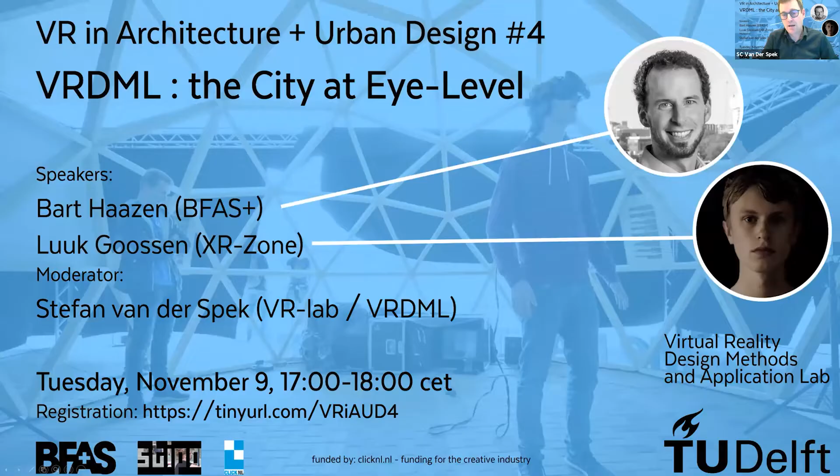Virtual reality, a better city at eye level. Welcome everybody.

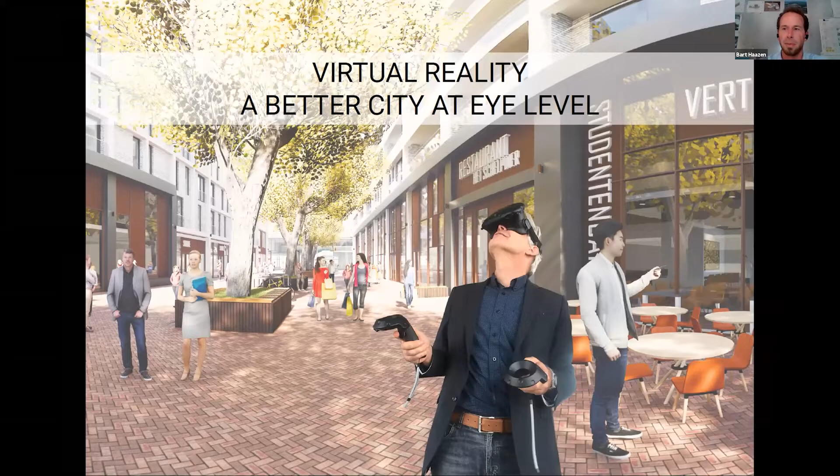A little introduction: my name is Bart Haazen, partner and architect of BFAS+. We do architecture, urbanism, and placemaking. For the past 10 years we've worked in 3D, and the last 5 years we've used VR as a design tool to develop our designs.

Via this way, we contacted STIPO and the TU Delft, and this was a real opportunity to take VR to the next step. We combined our VR team with STIPO, Sven, TU Delft, and BFAS ourselves. Sven was part of our team at BFAS - he's an expert on VR also.

How to make an attractive urban environment - that's what we see if we look around. You see nice places to be, but there are also spaces that you don't want to be. And how is it possible that still those places still are there?

What is going wrong? What we know is that the process in design is very complex, and it's still becoming more complex if we look to the future.

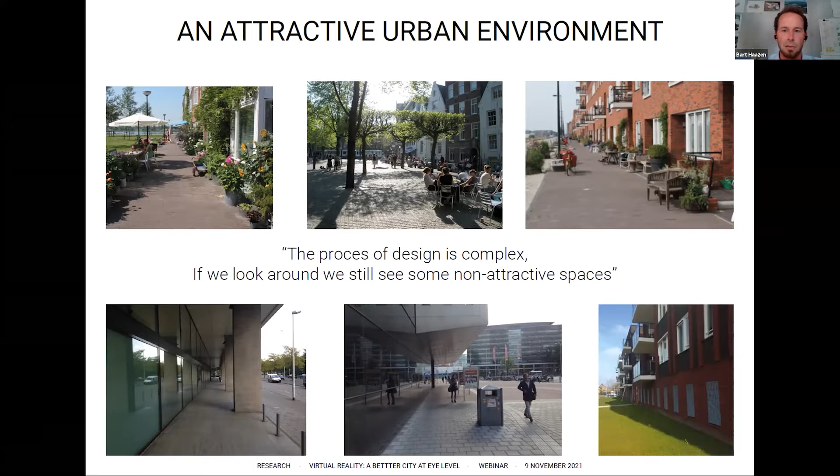One of the most important things that we as an office look at is the plinth of the building. It's just 10% of the building, but it determines 90% of the experience. We have a lot of tools to make the plinth nice and attractive, so that people don't only walk through, but really want to be there and want to sit there and talk there.

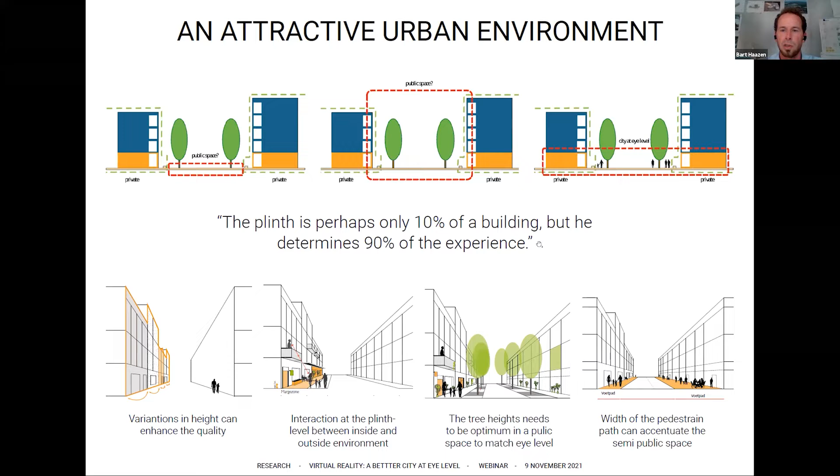So there are a lot of tools, you see that below. You can add trees or pavements, or have interaction with the plinth. You can model different heights to have more differentiation. There are a lot more tools to use to make it an attractive environment.

Virtual reality - what can it do to make those places nice? Is it only a nice experience, virtual reality? No, we don't think so as an office.

We really do think it is a nice design tool, because we use it every day in our architecture and urbanism as an individual designer. We use it a lot in the office, but also for cooperation with the municipality or other advisors. It's a very strong communication tool, also for people that live there, for participation in the environment. Those things are, how do you say it, general.

But the next step, we think, as with what we did with the VR team, is data analysis. That is really the next step in virtual reality that you want to research.

First, in the beginning, we had 2D drawings, then we had a computer, then we had to do 3D design. And in the last year, you see in the design that we use a lot of BIM data. If we put data in the design, other people, other advisors, can use that data to make fewer mistakes.

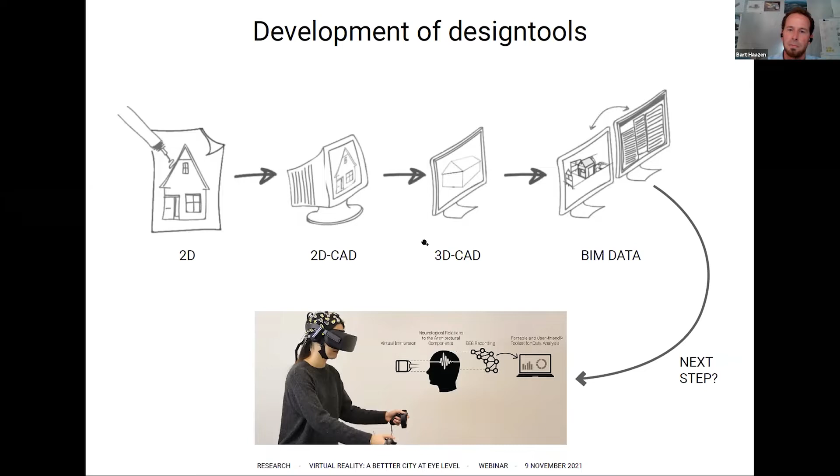These are some examples - voorbeelden, how do you say that in English?

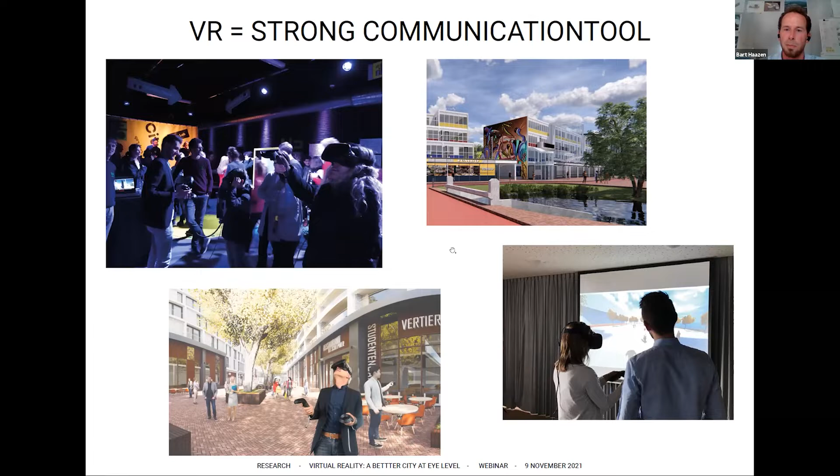Now I want to go to the research we did with our team. We did two researches: one is the street in Sluisbuurt, Amsterdam, and the other one is Bogaard in Rijswijk. I want to first show the first research.

This is Sluisbuurt, it's now in development. The municipality of Amsterdam, it's in the east of Amsterdam. And it's a precarious project because there's a lot of high-rise. The high-rise is a big discussion in Amsterdam because everybody knows it's a very historic center. This high-rise is a thing.

So we had an assignment with Amsterdam to look in VR what VR can mean in this street, and what it can do to enrich it, to make a good street.

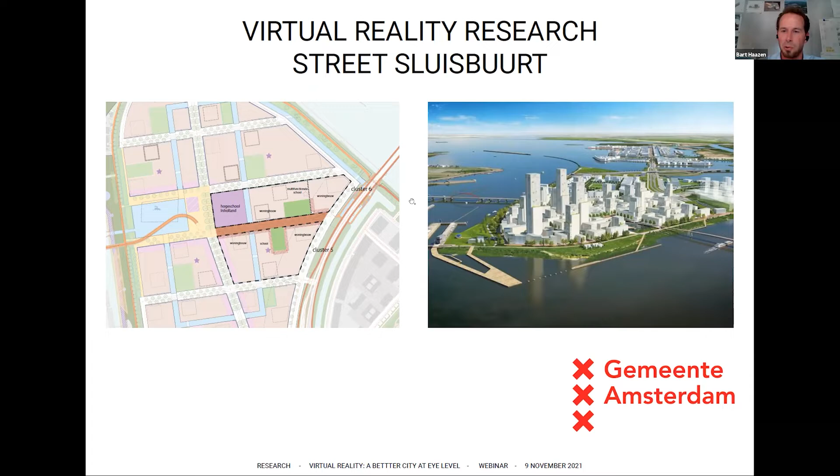What we did, we started with some ideas. We had a brainstorm with our group. So what can we do to research these streets? We talked about what we can do in design options in urban situations. Can we make a design option with high-rise or not? Or how much detail do we put in the model? How can our target group understand the VR?

So when we were thinking, we thought really: how can design influence the perception of the users at eye level? And what can we do?

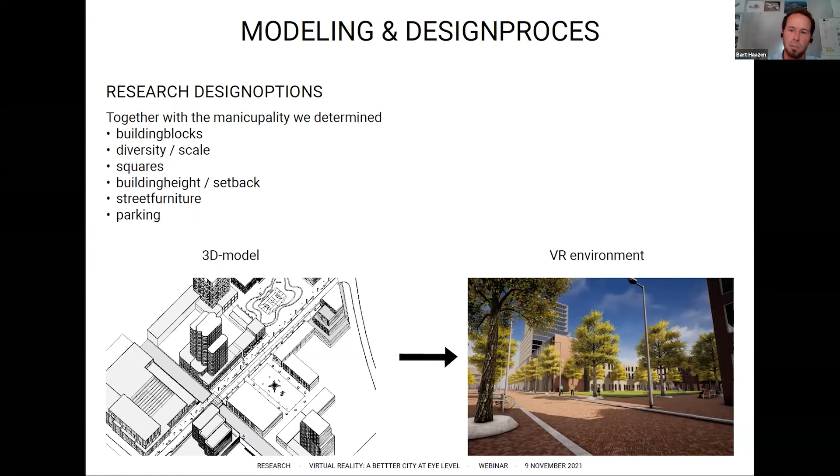We made a 3D model in Revit. We can do that very quickly, and we use Enscape, you see that on the right, to have a really realistic impression of that. This way we worked with the municipality through the model, and we had nice discussions.

Then we built the VR. We did the VR research session, and Luc will tell later about it. But the Enscape we made wasn't good enough for the VR, we couldn't use it, so we did some other nice stuff to have some data from the VR session.

First we did an intake, just some questions to people, like had they ever used VR before, that kind of thing. Then we started, and it was 3 sessions of 7 minutes.

First we started with a baseline. You walk through the model, the VR environment, for 7 minutes to see how it works, and so you know the way you want to walk. That was the first step.

After that we had 2 assignments, assignment 1 and assignment 2. In assignment 1, group 1 had a design option with all the things we had before, for example green or not green, low tower, high tower - that kind of design options we had built in.

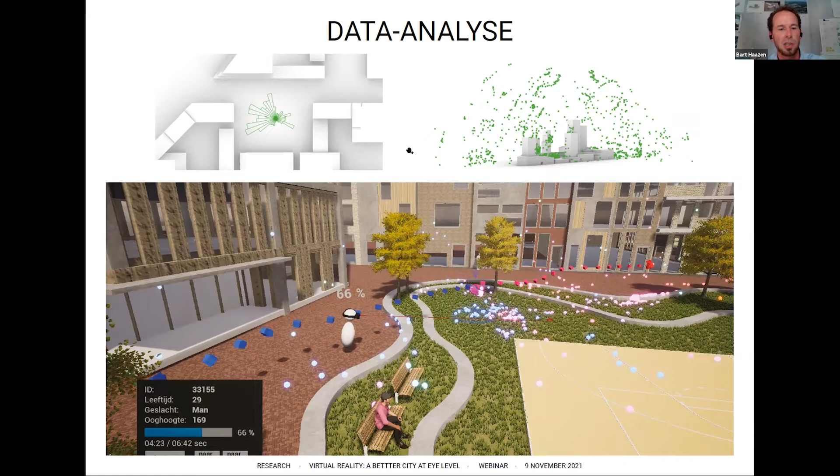After that, with the team, we looked at how we could use the data that came out of the VR session. Here you see one of the survey persons who walked through the model. You see part of the design in the square, and you see all kinds of dots and routes - that's all data. We also used other analysis systems above to search for interesting data.

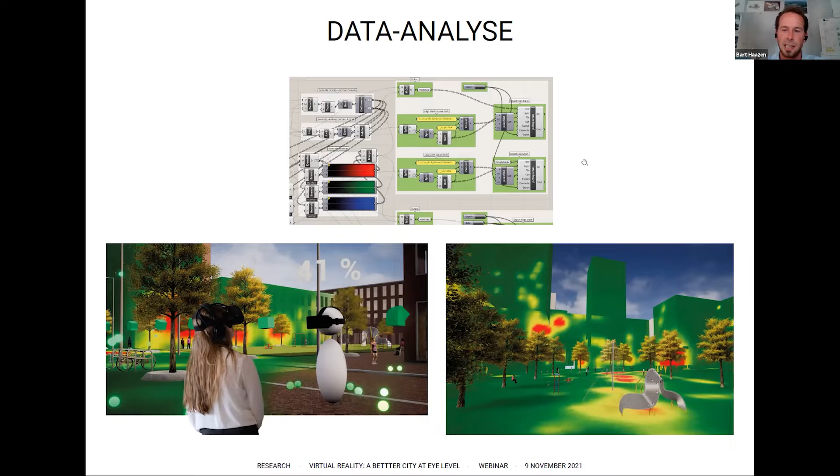A script was made to do that research, and we also had heat maps. The red spots are spots that people looked at a lot, and green less so. Luc will talk about this later. This is data that came out of the VR.

The conclusion, because we made a report - a very nice thing, the first point, is that most of the research group of students looked mostly at the height of 1 to 10 meters, 28%. They looked at the plinth height. The plan team and design team of the municipality did a bit less, because they're designers - they're always looking up. That's not the general person. We think it's very nice to see this, what I said in the beginning, that 10% is the plinth, 90% is how you experience it. I think this is a good test that it's almost true.

What was also very interesting is the corners - people looked a lot at the corners of buildings, which were also red-spotted. The students interacted differently with the area. They looked more at the walking people, because there were people walking around, cars driving, and also a playground with playground equipment. They looked more at those elements instead of what designers do - designers look at the facades, the architecture, and the environment. There was nice data there.

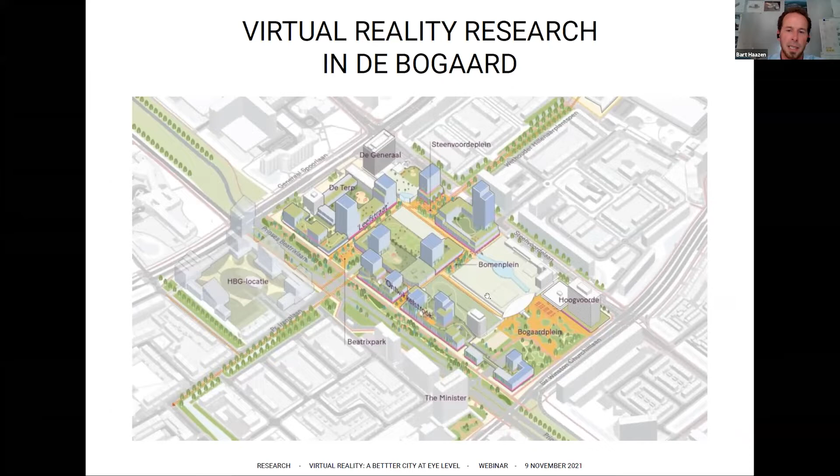We had here also some interesting design options that we wanted to research, and we learned from the past, so we had a different approach this time. We said we still have 3 walkthroughs, but we don't have assignments anymore. And to have really good measurements, we used these kinds of 360s - Luc will talk about that - and we can really compare the data.

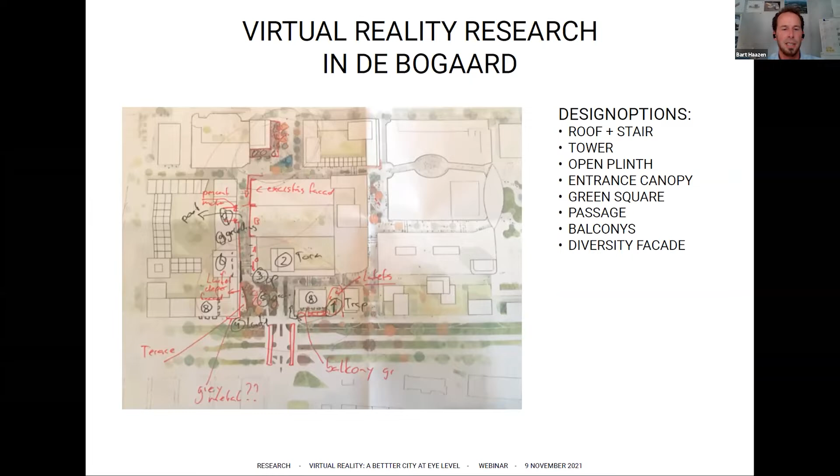I've shown a lot of information, but to make it more understandable, I have a little Enscape session for you, so I want to end with that. Let's see it in motion - there's a slight delay probably, but that's okay. It's graphical.

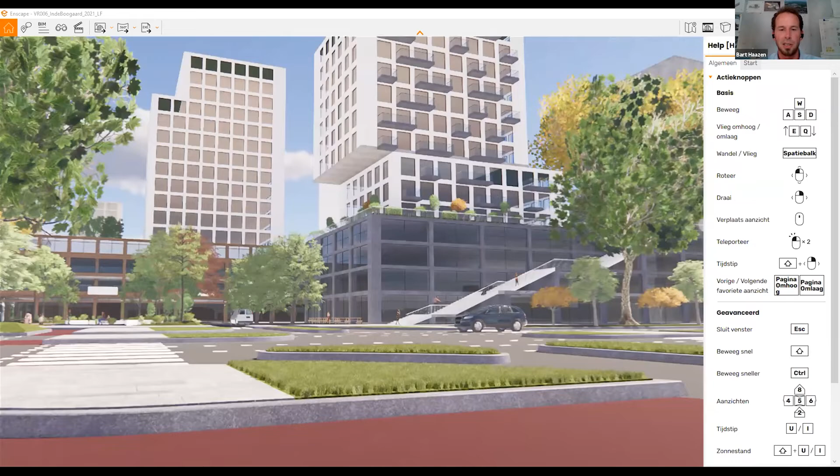Here all the options are on. For example, this stair - with one option, the stair is gone. We wanted to see the interaction of people, because you really see that you can manipulate people by design.

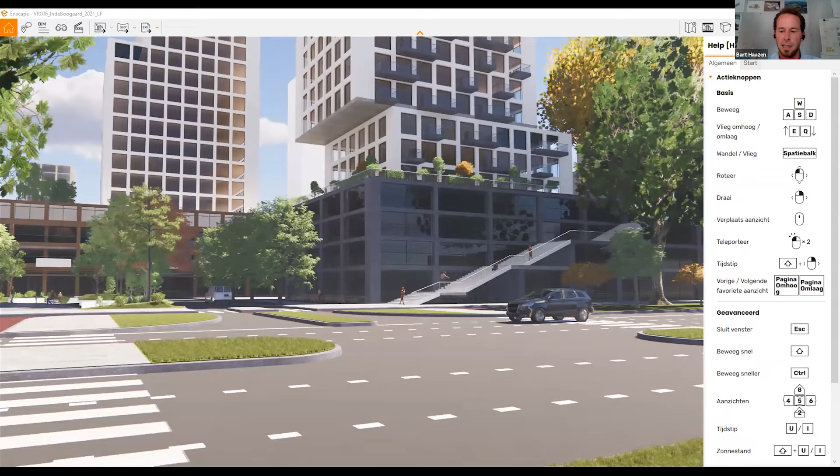There were 8 design options that I showed before, and we incorporated this into the model. This is not VR - we don't have the glasses on, so it's still flat, but this way you can see how we did the research.

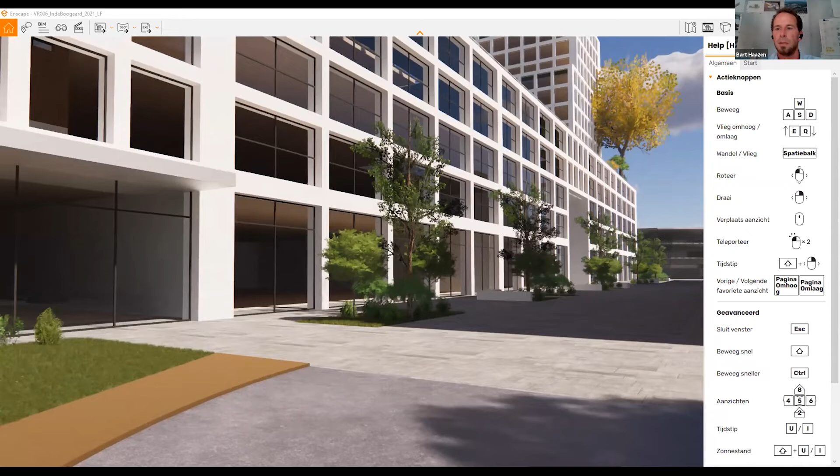Another research topic was this canopy - do you want it or not? Now, the municipality first said they wanted it, it was very important for them. In the VR, it was gone - they didn't want it anymore. This shows VR is a very good tool to use.

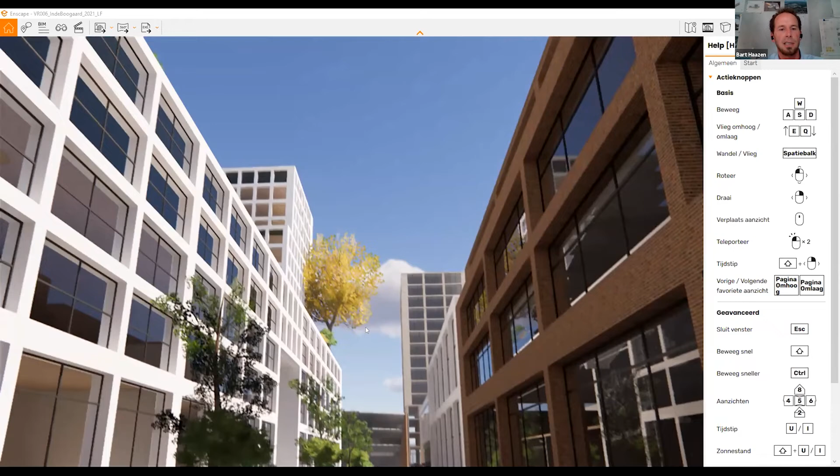Also in the plinth, we want it open. In the other design option, it was closed, because they didn't want open facades here - it had to do with the existing buildings behind it, or for example the setback of the tower.

We talked about that, and then we also had a passage, which was an interesting design option. We went through the model and people walked through it. You don't see that here, but everything is standing still.

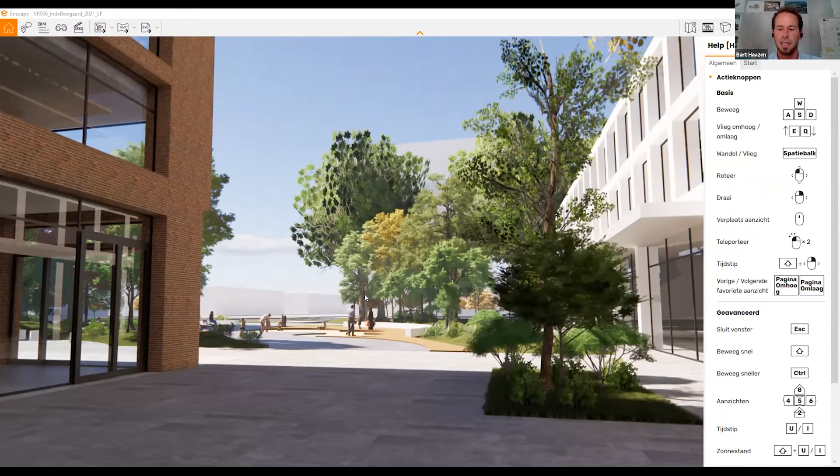But that was also the next step for Luuk - we really want to make an interactive environment, where you see people walking and cars driving. And this is where I want to end my presentation.

Perfect. So let's talk a bit about what we as TU Delft did. I understand there are a lot of TU Delft students and staff on this call, so maybe I can tell you something new as well. Together with Bart and the rest of the team, we worked on ideas for the Better City at Eye Level. The main focus of our task was developing the VR application and the tools for data analysis.

So who are we? We're the VR zone, soon to be rebranded to XR zone, as Stefan already said. We're located at the central library, and our main goals are to support education, support research, and do our own research and design development. We're open 9 to 5, Monday to Friday. Any student can come in - we have hardware here, and 10 staff members available to answer questions. You're always welcome to come in for advice, brainstorm, and learn and work with VR in any of your designs, cross faculty - architecture, maritime, or aerospace. We're always ready to help and brainstorm with you.

We also have our research tracks. We work as a centralized lab compared to what Stefan does with architecture. We mostly work cross-domain, developing applications for any faculty or topic. Our main focus is design rather than writing the actual papers, whereas the faculties have their own researchers who write the papers and understand the data - we just provide the tools for them. So researchers are always welcome to come in.

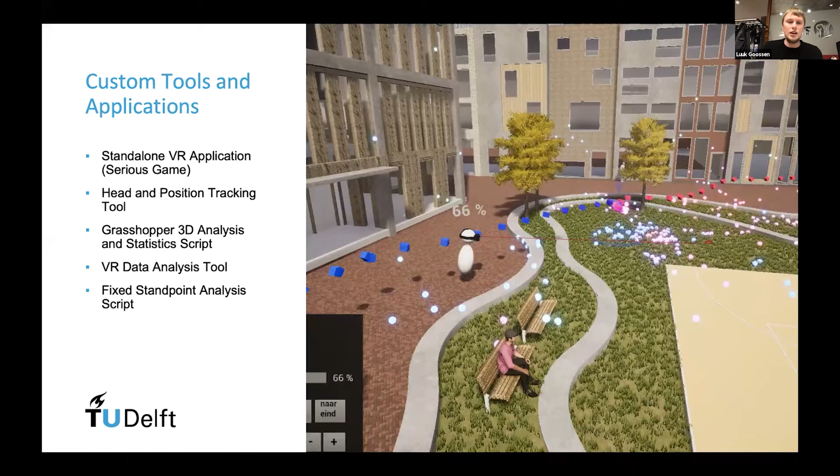So let's talk a bit more about the head and position tracking that I mentioned earlier. Essentially, head and position tracking is a method for a cheap replacement of eye tracking. Eye tracking is a technology used to detect what people are looking at. With head and position tracking, rather than measuring the eyes, you measure the rotation and position of the head. The position is important because we know the location of the participant within the map, and the rotation is important because we know what they're actually at least gazing towards.

So there's a couple of pros and cons to using this technique. The most definite pro is the very high level of support, because essentially to have virtual reality, you either need 3 or 6 degrees of freedom in your hardware. 3 degrees of freedom means you can rotate, so you can actually see what's happening. 6 degrees of freedom means not just you can rotate, but you can actually move your head sideways or up and down, and it registers that as well.

Most VR goggles available right now already provide 6 degrees of freedom, so essentially any modern VR device would already give you support for focus tracking. It's also very easy to implement, because all you need is the position that the headset's focusing at, a parameter that any VR application already makes public. So it's a very robust way of collecting data.

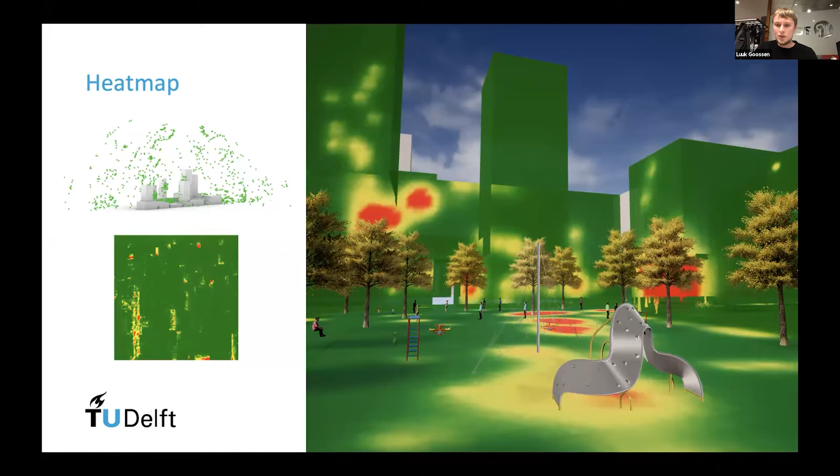So that really helped us understand what people were looking at. For example, using these heat maps, we figured out that people spend a significant amount of time looking at corners.

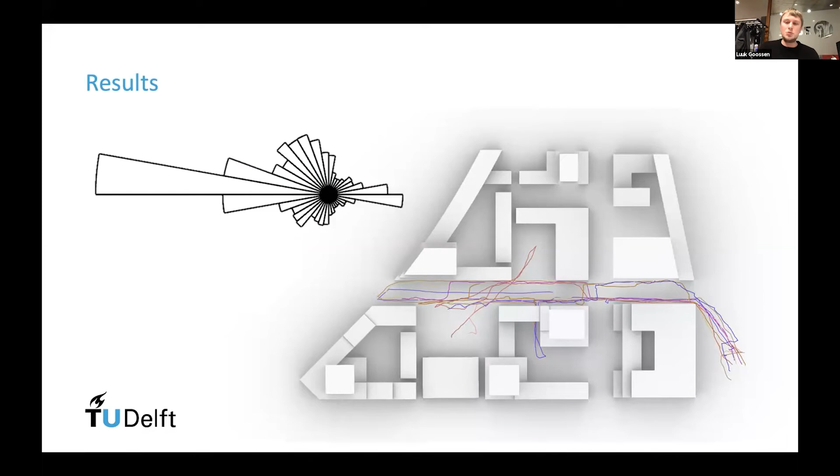But we could compare the results between the different participant groups and see if certain groups looked around significantly more than others. The same goes for height, where we could calculate the average categorized heights people were looking at, based on the altitude of the points, where Bart already told you a lot was between 0 and 10 meters. So that was very important for our research.

But there are a couple of problems that definitely need to be taken into account when setting up something like this. One is accuracy — especially at an urban scale, you're dealing with a margin of error that's definitely not insignificant. So you can include error bars in your results.

Still, at some scale, you might want to go to eye tracking, which is now much more available than it was three years ago when we started this project. So that's an important thing to note.

If you do research like this, it's worth investing in hardware that gives you accurate data. Also, the target groups matter — half of our participants were involved in the design of the environment.

It was interesting for us, especially given the experimental nature of the research, to see the difference between people who were involved and those who weren't, even though the involved participants still didn't have much experience with the VR model.